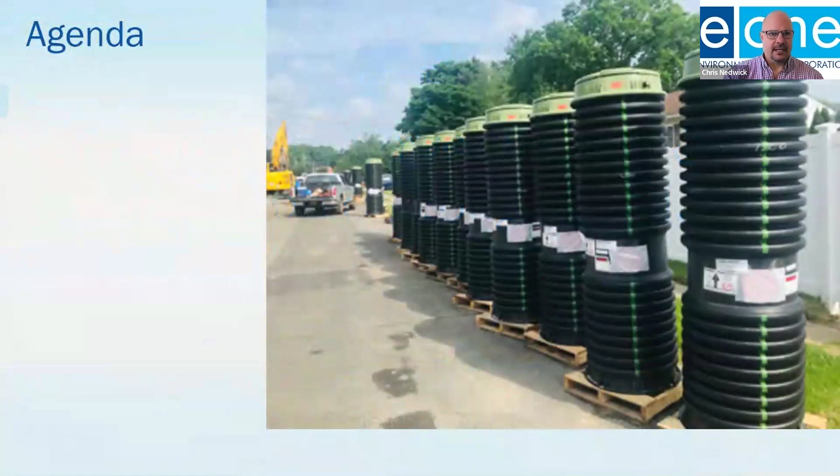We've got a lot of really good content that's specific to some examples in Long Island, New York, which is an exciting development for Environment One and for the community, and a lot of good content related to pressure sewer in general. Without further ado, I'd like to jump into the agenda.

We'll talk a little bit about the company background, sewer systems in general, pressure sewers, design factors related to pressure sewers, the E1 system, and commercial applications. And then finally, at the end, we'll have some time for questions and answers, as Rachel mentioned.

So a little bit about the history of the company. Environment One started as a General Electric research and development spinoff back in the late 1960s. The company was formed in 1969. We've been in the same location since then, developed the technology as a pioneer at that time and continue to do so.

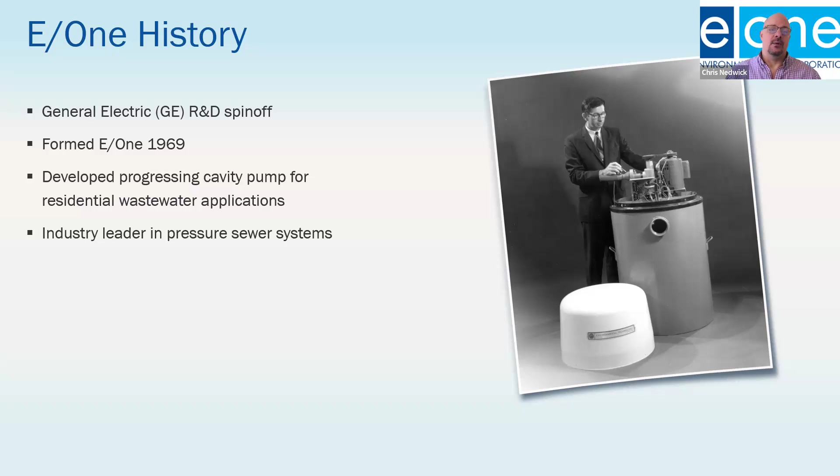We developed the progressing cavity pump specific to residential wastewater applications, really starting with the design challenges and working backwards to the design that's still consistent to this day. We are the industry leader in pressure sewer systems and very proud to say so.

We are in Niskayuna, New York, in Schenectady County in upstate New York. We have about 140,000 square feet, ever growing, available to us at our manufacturing facility, with 140 plus employees.

In conjunction with showcasing E1 as an industry leader in this market and beyond, we're also proud to be partners with Site-Specific Design. Site-Specific covers about 45,000 square miles, so they have a very sizable territory with 4 offices and 10 full-time service technicians to support these systems as we install them.

The design criteria that was specific and original to low pressure sewer was actually adopted by the American Society of Civil Engineers, and this really created the pressure sewer market as we know it today. Our design has been consistent with that criteria from day one. We continue to enhance, perfect, and improve that design on a continuous basis from a continuous improvement standpoint.

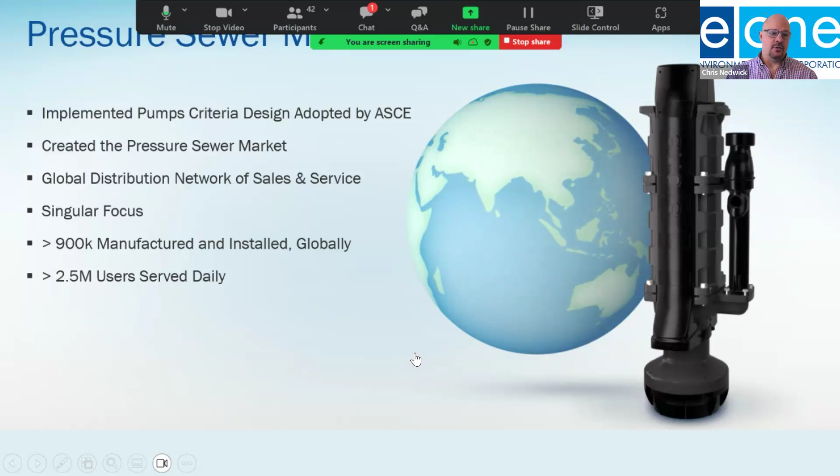We have a global distribution network of sales and service entities, a singular focus on this technology with 900,000 manufactured units installed globally, and about 2.5 million end users that utilize our products on a daily basis.

Our mission really is to provide complete and accurate design recommendations for pressure sewers to suppliers, engineers, and customers. Our focus is on the end user and the quality and optimization of the design. So we always want to keep that focus on making sure that the customer experience is positive.

As a trusted advisor, we support our customers from the planning and design phases of a system through construction and the life of the system. We'll talk a little bit more about that here today—things like contractor training, end user training, and service training. We really want to stay focused all the time on ensuring that things are done right and done properly.

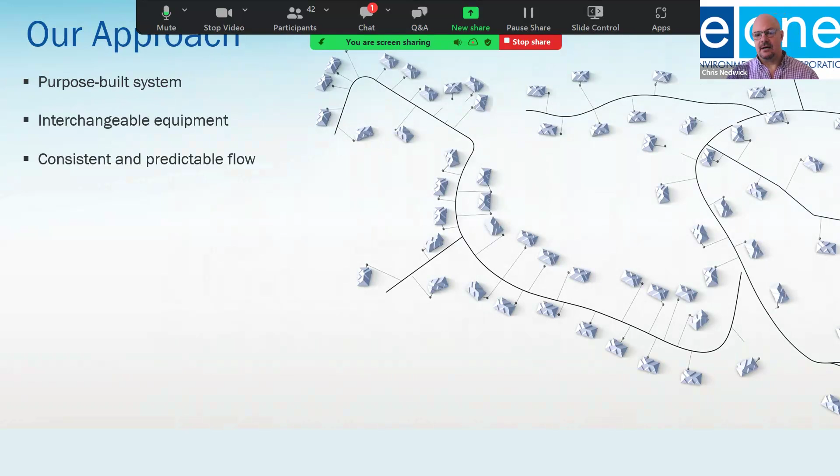So our approach is unique. We have a purpose-built system. Everything that we offer as part of this system is interchangeable and reverse compatible. A consistent and predictable flow is really at the heart of our pumping system and the designs that we create, in conjunction with engineers of record out there in the community as well. We want everything that has to do with these systems to be consistent and predictable.

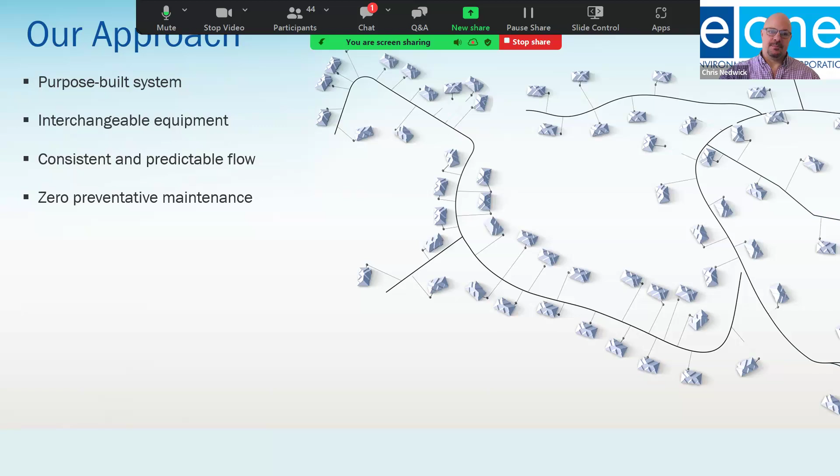There's zero preventative maintenance required with E1 systems as a UL approved appliance. Very important to our overall philosophy. Simplicity of repair and or replacement is also very important, and it helps keep cost of ownership as low as possible. Safety is number one with Environment One, not only as a company, but with the systems that we provide. We want to make sure that safe operation is top priority and that maintenance is always kept efficient and as simple and low cost as possible.

Continuous improvement is something that I mentioned earlier. We really have a strong focus on making this technology more reliable, more predictable, and keeping that cost of ownership to the end user as low as possible.

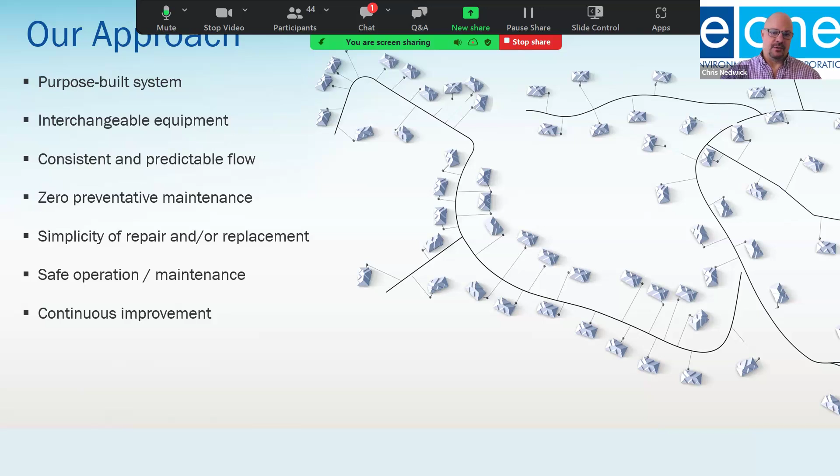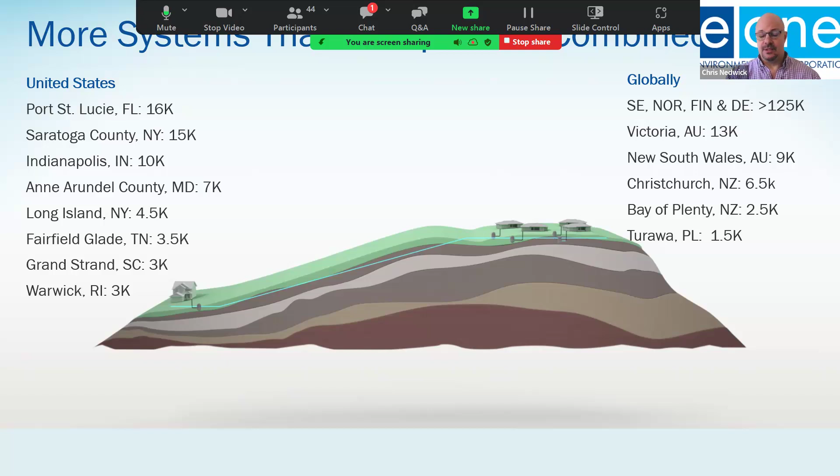So we have more systems than the rest of the industry combined, starting with Port St. Lucie down in Florida with 16,000 homes and businesses currently connected. Saratoga County, a similar number at 15,000. I won't read through every bullet here, but Indianapolis, Indiana with 10,000+ homes. In Long Island, we're already up to almost 5,000 homes at this moment. So the idea here is to show and demonstrate that this is not a new technology. It is a proven technology with entire communities that rely on E/One for their wastewater services.

Experience matters as well. In places like Albany County, with the original prototype system that we implemented 56 years ago, these systems are still running strong after all this time. So this is, again, a proven technology with a demonstrated track record.

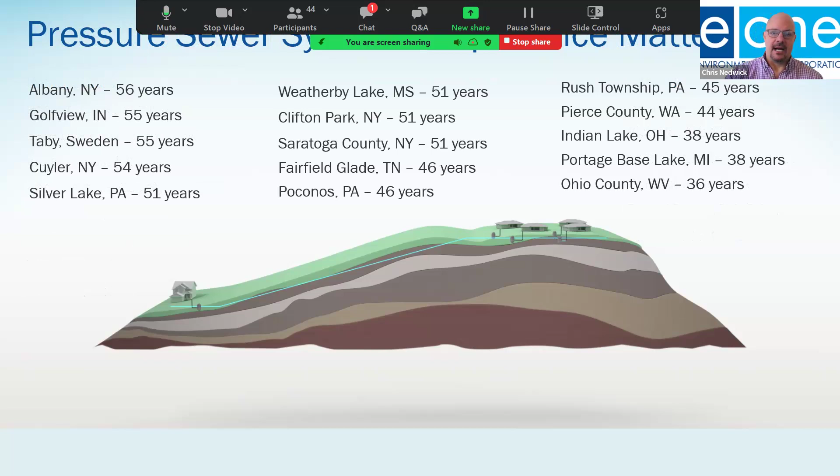And I'd like to hand it over to my colleague, Rachel Seiler, at this time for a poll question.

Yeah, so it looks pretty interesting and kind of what we would expect for the marketplace. I think most people on the call might know me. My name is Sean Cameron with Site Specific Design. We are the manufacturer's rep for Environment One in the territory, and I'm going to talk to you guys a little bit more about the experience and stuff we've done on the Long Island market up till now.

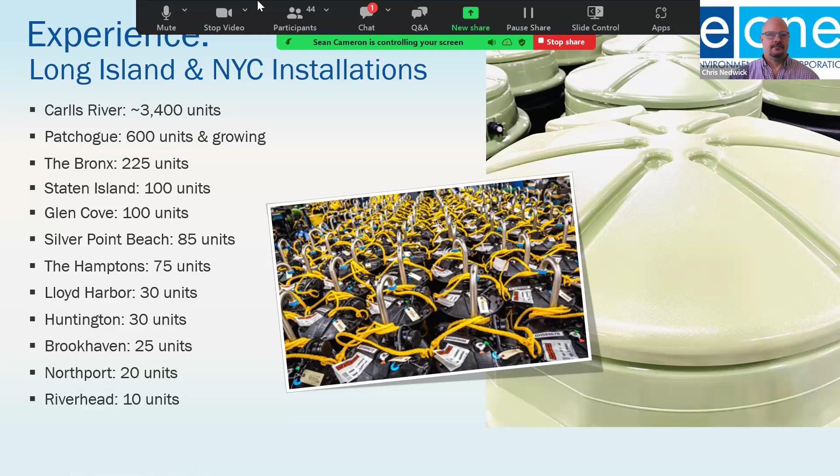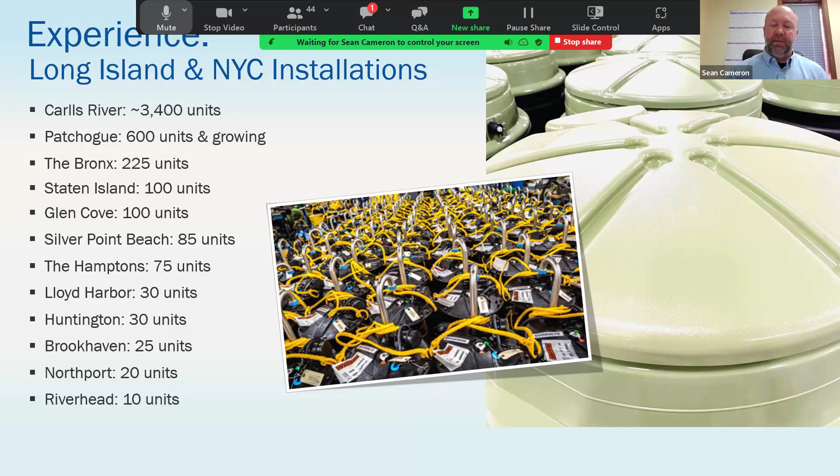Specific to the Long Island market, we have about 3,400 connections in the Carlls River area that took place over the last 2 to 3 years. A bunch have taken place in Patchogue. There's a huge project underway right now in Forge River that isn't on the list yet because they're not in operation. But as you can see, we've done a lot of different installations and applications on the island over the years.

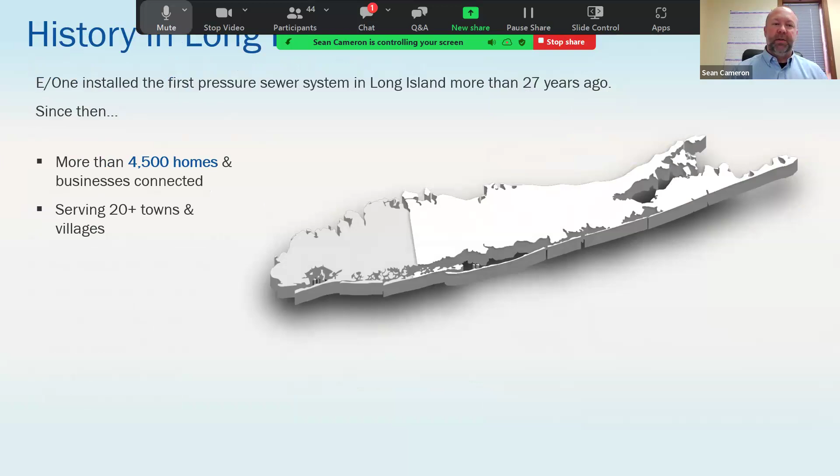We've connected to date more than 4,500 homes and businesses across the island. We've been doing this on Long Island for over 27 years. The first system went in a long time ago. We service over 20 different towns and villages throughout the island. We help bring several of these key projects to fruition with different technologies and tools that we have at our disposal. And in the future project pipeline over the next 5+ years, there's a lot going on there. New projects popping up every day. We remain fully committed to that cause.

Our goal is we want to work with the design engineers, the contractors, the municipalities, regulators, and everyone. There's a huge challenge when it comes to sewering areas, and we're involved in working with you guys on that.

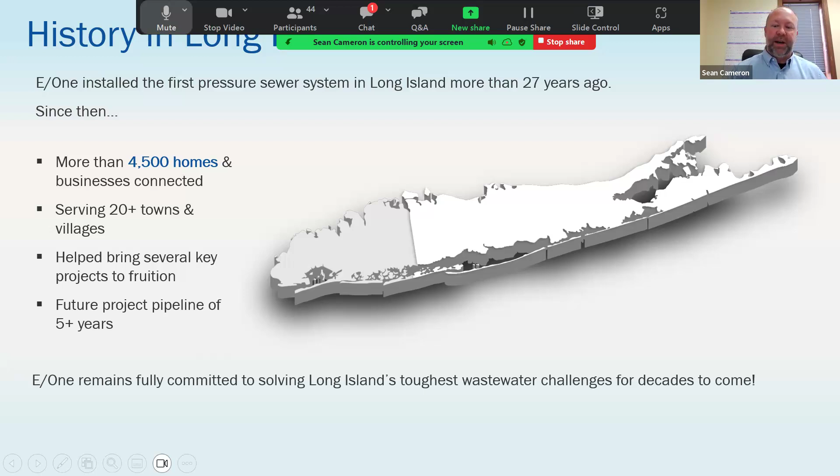Patchogue specifically, we like to touch on. They were the first place in Long Island to really adopt the pressure sewer technology. Currently to date, we have about 700 homes and businesses connected, and more going on this year. But their first system went in back in 1999, 2000, that era.

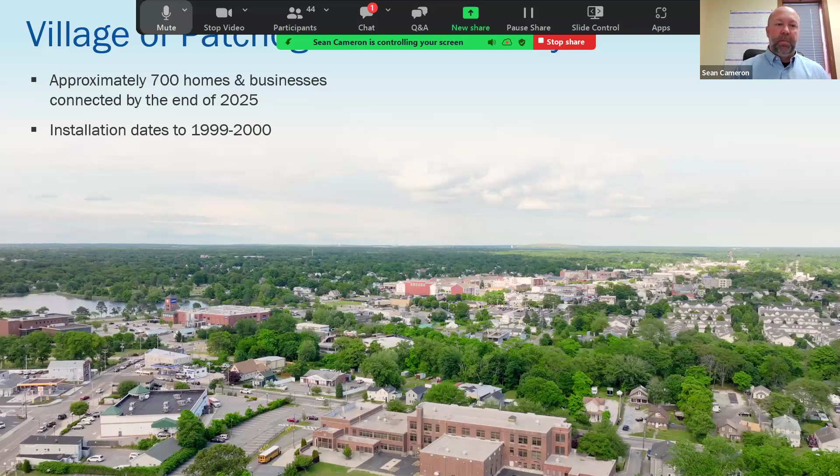Was a couple dozen connections down on West Ave and Main Street. We've been involved with them since the beginning. H2M architects and engineers were involved in that original design, and Chris Weiss has been a key player in that from that engineering group since the beginning.

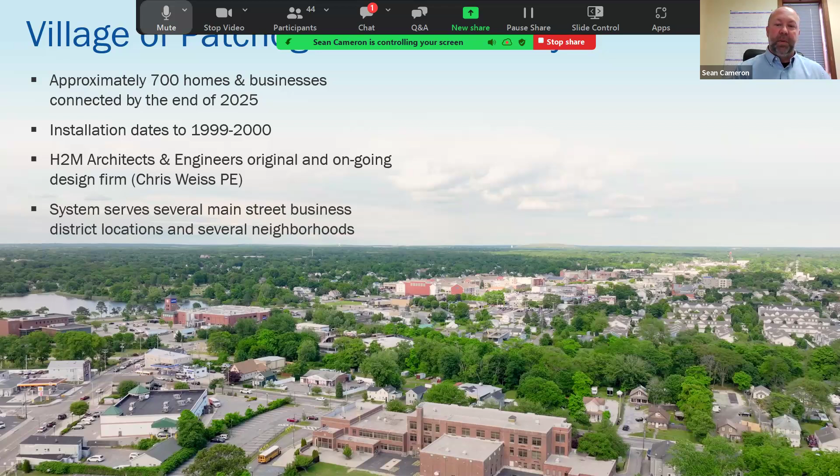These systems serve several Main Street businesses. Realistically, if you go to almost any restaurant in Patchogue, there's a chance that it's connected by pressure sewer to the gravity system, as well as a lot of the southern neighborhoods down near the South Shore.

One of the things that made this possible for Patchogue and all the other areas is, of course, a functional wastewater treatment plant.

Patchogue was kind of ahead of the curve on this. They built their own plant many years ago. It's currently up and rated for 800,000 gallons per day. But to date, they're only really operating in the 400,000 to 500,000 gallon per day range. So they have a pretty good amount of capacity already.

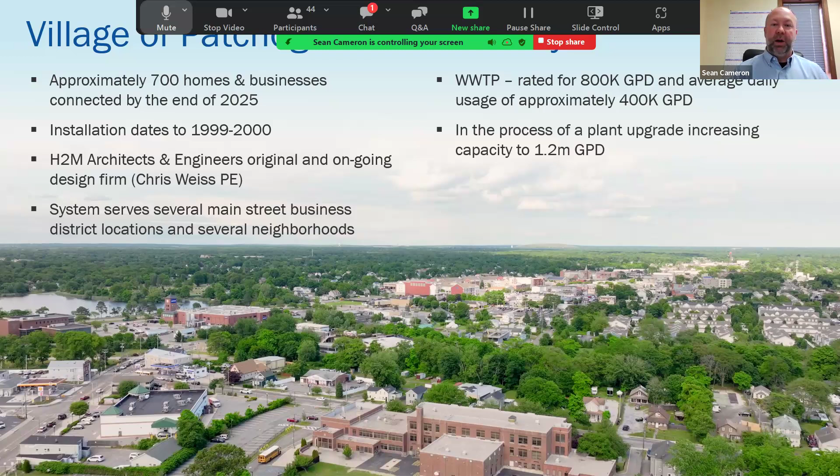But as we're looking at this, we intend to continue expanding on this. So in the meantime, in the background, they are also working on looking at some plant upgrades and increasing that capacity to about 1.2 million GPD.

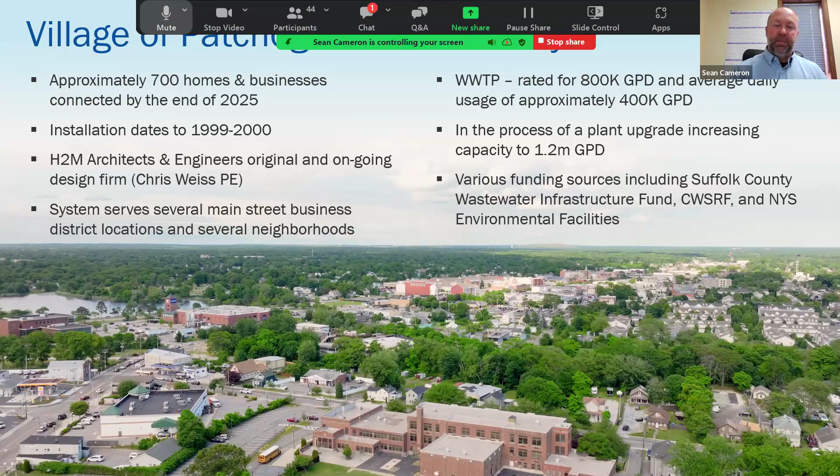So a lot going on there. Funding for this has come from many different areas. We had the Wastewater Infrastructure Fund for Suffolk County, CWSRF funds, and New York State environmental funds. Lots of different areas, but obviously a huge need in Patchogue as well as some of these other areas. So finding the funding has been key to getting that done.

So we're going to touch just on kind of sewer systems as a whole. I imagine for a lot of people this could be review, but we'll go through the basics. As we saw on the poll there, gravity sewer is something that a lot of people have worked with and designed. Pretty traditional design.

You have a pipe coming out of the house into a collection system located in the easement or roadway. That pipe connects into larger diameter pipes in the road, and eventually that will go to some sort of a manhole or pump station or directly to the treatment plant. This is a very widely known functional sewer technology.

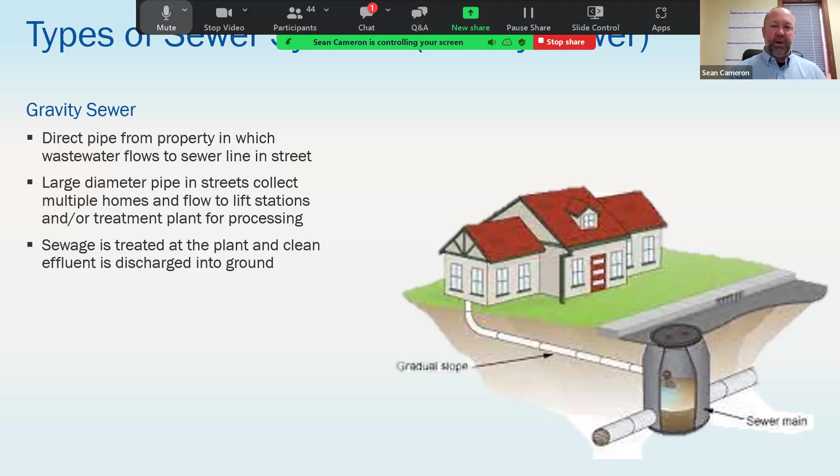Secondarily, probably the second most well-known technology would be septic tanks and cesspools. We have wastewater flow coming out of your structure, could be a house or business, into a holding tank. In Suffolk County, for example, as most of us know, prior to 1973, there wasn't even a requirement for a septic tank, so a lot of this flow was just going straight into cesspools.

In 1973, they came up with the regulation that you had to put a septic tank in front of that flow to collect the solids. And then the effluent that comes out still goes into the cesspools in a lot of areas.

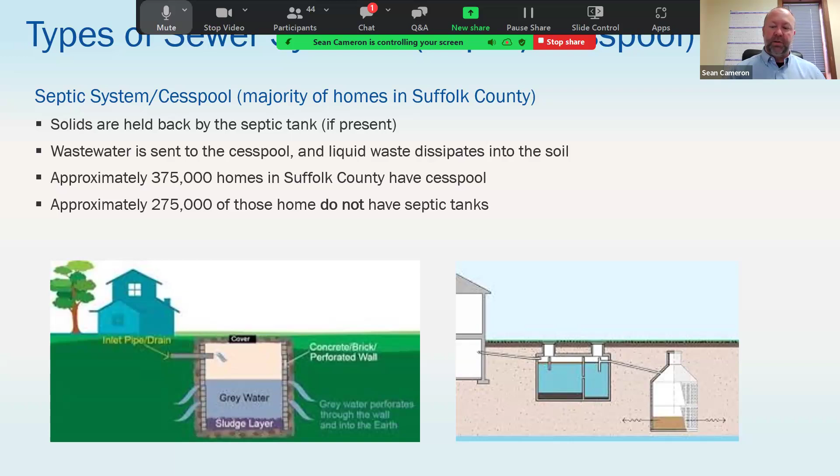Approximately 375,000 homes in Suffolk County are connected to a cesspool, and approximately 275,000 of those, built prior to '73, did not have septic tanks. That number may have gone down recently with the new regulations -- if you pull a permit, you either have to go to the septic tank or some of these other technologies we're going to talk about going forward.

So with septic tank and cesspool situations, you tend to have issues. With any technology, there's going to be pros and cons. With septic tanks and cesspools, as those units break down and fail, you can leach pathogens and noxious material into the ground. In Long Island, we're on a very high groundwater table and above one of the largest natural water aquifers in the world, so there's some more issues that could come to play there.

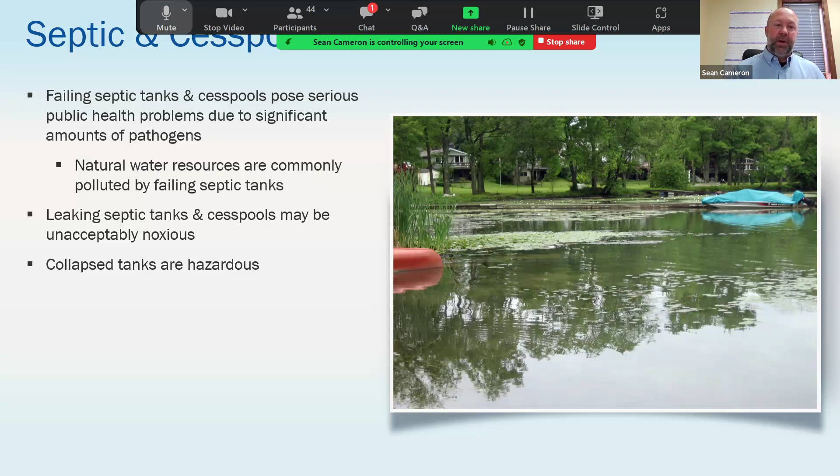So just some downsides of what you can see. As a result, Suffolk County did a case study back around 2012 where they looked at the state of the wastewater situation on Long Island. And what they found was that there were more than 400,000 septic tanks in place.

70% of those were installed before 1972, which required septic tanks, but I think it's cesspools. A lot of these were having issues and failing, and 69% of the nitrogen flowing into the Great South Bay was a direct result of these failing septic and cesspool systems.

Obviously that had negative effects on the ecosystem. Anyone who lives on the island or has been there knows the fishing and shellfish situation has changed drastically off the shore over the years, and a lot of that is a direct result of these high levels of nitrogen going straight into that ecology and ecosystem.

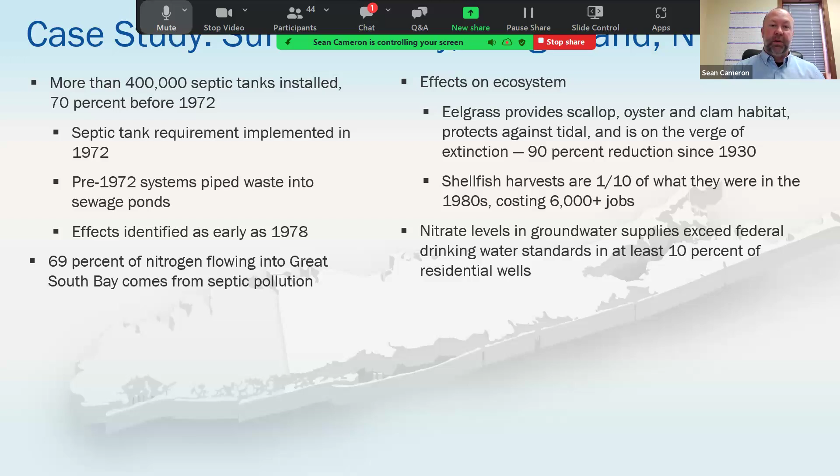So nitrate levels in the groundwater exceeded the federal drinking water standards in residential wells. They realized there was a problem and had to look into what options they had. It took time to do the research into different technologies and what good options were available.

They came up with two primary ways to address this. The first is IA systems, innovative alternative septic systems. These are essentially little packaged treatment plants installed in the ground in someone's backyard or side of the house. They can also be used for commercial applications.

The way these systems work is flow comes out of the house, goes through a septic tank to hold back the solids as well. Then the effluent goes into a treatment chamber or multiple treatment chambers, and that effluent is treated by introducing an oxygen source to let the bacteria live and thrive.

Your carbon source is your wastewater, so that's kind of a food aspect for the bacteria. And then you need a surface for that bacteria to grow on. Some technologies use just the walls of the tank, some have little balls or bags or plastic discs.

There are several different technologies approved in Long Island. Each does it a little differently, but at the end of the day it's the same process - we're growing bacteria. We nitrify and denitrify to get total nitrogen levels below 19 milligrams per liter, and then we're discharging a much cleaner effluent into the ground, into that same cesspool or a shallower depth type dispersal system.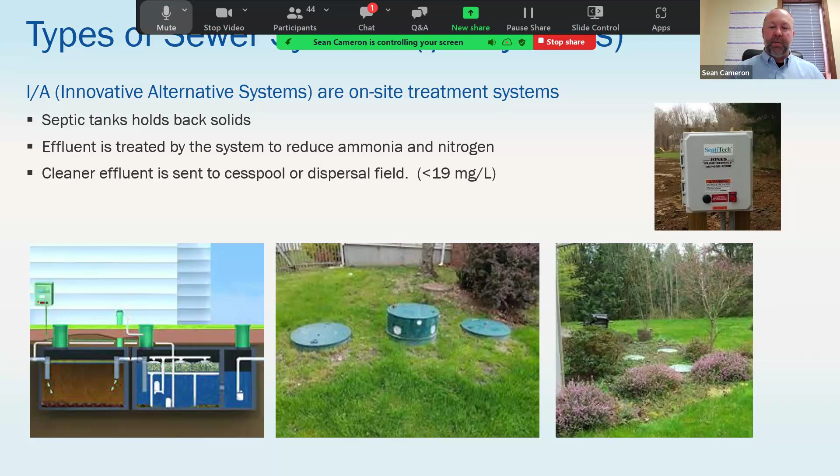The second type of technology that they looked at, and what brings us to our conversation today, would be pressure sewer systems.

So as Chris had touched on some of the history, we get more into what is a pressure sewer system. The basic view is that you have a tank, wastewater from the household flows through the pipes into this tank. As the water level in the tank rises, there's a level sensing device on the pump that activates it.

The pump will turn on, grind up all the wastewater into a fine slurry, and pump it out through a small diameter pipe to the road. Smaller diameter pipes in the road can get bigger as more connections are made, and then it eventually will pump to a treatment plant or something of that sort.

The grinder pumps can be installed outside in a yard or in the basement, just somewhere they can collect the flow from the residential or commercial connection. And obviously we want to keep the discharge lines below frost grade to keep them from freezing.

I always like to note that a grinder pump is different from an ejector pump, where an ejector pump is normally used in a lower level of a building for just one level of sewage to pump up to an already existing gravity output.

These pumps are typically designed for the entire flow of a building, and we are grinding everything up and pumping it into just about anywhere, but the ultimate design is a pressure sewer system.

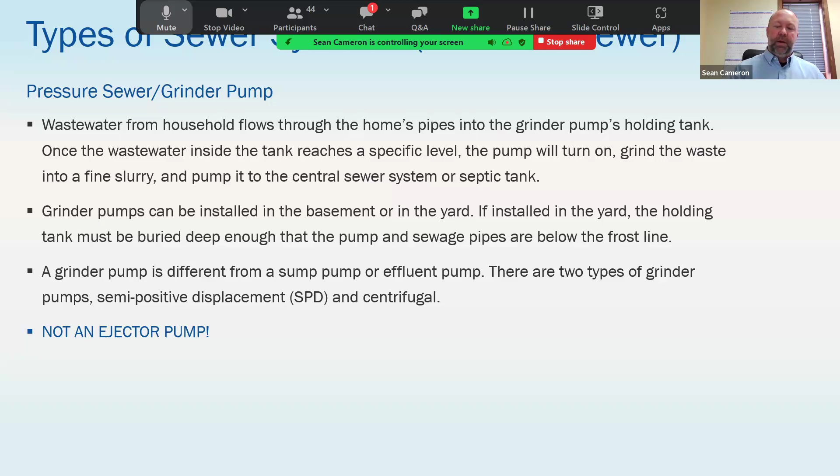As a result, the grinder pumps are here to stay. It would be safe to say that the IA technologies are doing very good in areas as well. The grinder pumps are used in areas where there is a centralized collection system and wastewater treatment plant - Bergen Point, also Patchogue and some other areas. The grinder pumps have been the go-to there, where you can centralize it and get even lower levels of total nitrogen that get into the ground afterwards.

To date, Suffolk County has installed over 3,500 grinder pumps in the last 2 to 3 years, and we are actively in the process of doing another 2,000. That should be done by the end of 2025.

The majority of these were in the Carlls River area, and Forge River is the project going on now, so that's the Shirley Mastic area. We've done several hundred, obviously, in the Patchogue area as discussed. We've also done projects in Northport and East Quogue that we continue to grow on, as well as tons of one-off applications throughout the entire island.

The force mains were installed in the streets, and then the grinder pumps were contracted separately to be installed on each individual property for all these connections. So at this point, I'm going to pass back to Chris to talk about some of the technology on a deeper level. Thank you, Sean.

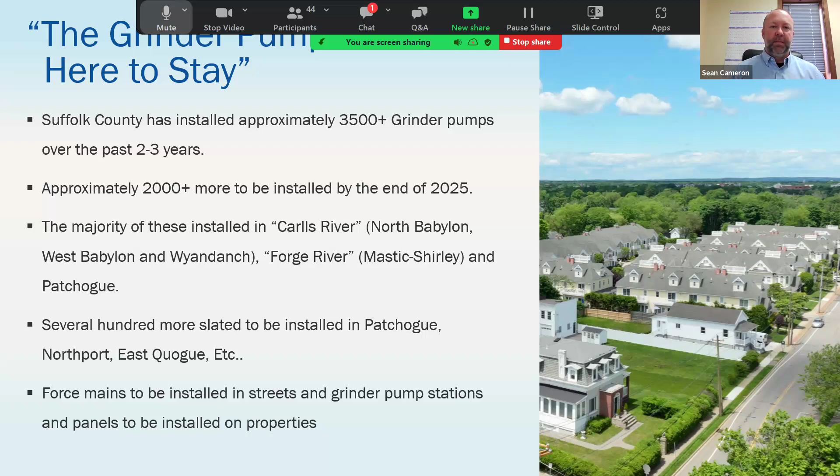So at this point in the presentation, we'll talk a little bit about some of the different types of technologies that have been mentioned already. We'll start with gravity sewers, and these are myths and misconceptions. One of the largest misconceptions we've all encountered over the years is that once gravity sewers are installed, they're free. This is not the case. Gravity sewers are actually very costly to maintain.

Anyone who's seen a Vactor truck or a closed circuit television system, or witnessed smoke testing taking place, knows it's a pretty involved process and tends to be very expensive. So that is a myth and misconception, that there's no regular maintenance required.

I&I is a very serious problem throughout the industry, and gravity systems are susceptible to it. We test gravity systems in this industry to locate I&I hotspots and eliminate them, so there aren't complications downstream at the wastewater treatment plant, and no cost associated with transporting and treating I&I. It's one of the most costly line items typically for any organization responsible for maintaining a gravity system. Chasing I&I is a big deal, and there are lots of firms throughout the country devoted specifically to this.

Also with cesspools, not having to pump them out regularly. Anyone who's been around the various communities in Long Island knows that emptying cesspools on an annual or even every couple of years basis can be very costly, and there are industries associated with this. It can cost anywhere between $600 and $1,000 to pump out a cesspool.

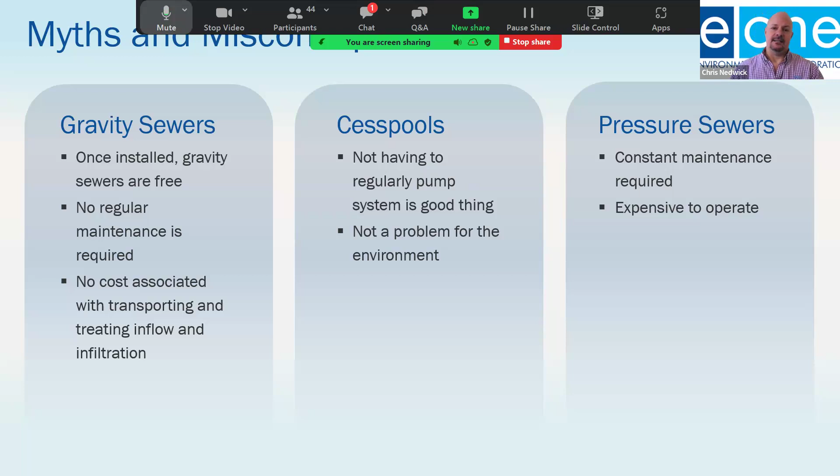We know through third-party data that one full-time service technician can service up to 1,400 homes in some cases. And even when you factor in energy costs, even with inflation in recent years, $30 to $35 a year is typical. So it's a very cost-effective way to introduce sanitary collection.

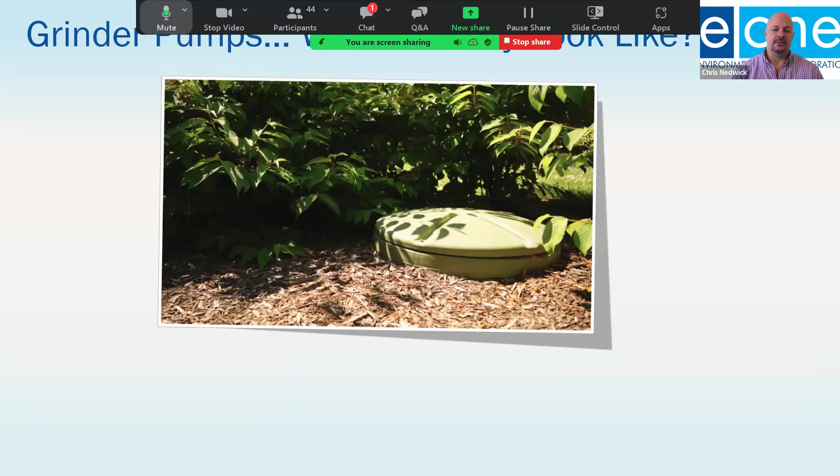What does it look like? This is an E/One station, and we take great pride in everything that goes into the design of this system. We try to make them as innocuous as possible, and we try to fashion the tank in such a way that it can blend into the neighborhood, the yard, the natural environment. It's an earth tone meant to kind of blend in. We want it to be somewhat hidden, if that's what the homeowner wants.

In some cases, these might be located closer to the point of demarcation between private and public lands. If the public entity is taking care of and maintaining the system, it might not be behind a bush like this, but as design engineers, it's important to know that flexibility is afforded to you.

Once it's installed, it does blend in, and there are a variety of different options available to keep with this theme. That's what we call a fake rock—it's a rock that covers the cover. Underneath that would be the cover you see on top, and that helps it blend into the environment a little bit more.

And then the system on the right is an IDU, or indoor unit. That's a 90-gallon tank, comes with a 5-year warranty, and can be located inside of the dwelling, the residence. It can be buried in the slab, so all you'd see is the very tip of the cover, or it can sit on the slab like you see there, and it's piped up basically to the main ventilation in the plumbing system in the house, and the main stack.

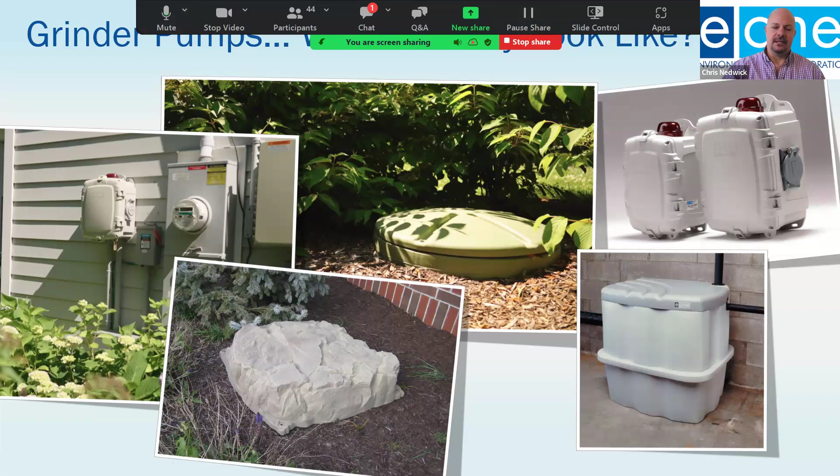Here's just another shot of the cover itself on the right. It's the enclosure, is what we call it—that's a technical term for it. And that is an alarm panel, it's not a control panel. So the controls in our system are installed in the pump itself, and the alarm features predominantly are what's located in the enclosure.

So a great question we hear is, where do we use pressure sewer systems? The answer is really anywhere where the flows are appropriate. But what we see mostly is where there's undulating terrain, not such a prevalent condition in Long Island—you get a lot more of that upstate. In other areas where the soil's rocky, that's going to be the case more so on the North Shore than the South Shore. Where you've got a high groundwater table, that could be the case anywhere in Long Island.

Because it's a small diameter technology that's far less invasive than gravity, you've got less excavation, so you have less issues managing groundwater, and really controlling those flows, documenting those flows, and having a place to put them. Flat terrain is a geological condition that's prevalent in the Long Island market.

One thing I want to pause on is that we drastically reduce the amount of lift stations required, or in many cases outright eliminate them. Flat terrain demands lift stations when used in conjunction with gravity, so eliminating lift stations can, in many cases, eliminate millions of dollars from the budget of your project. That's a very appealing thing engineers look at when considering pressure sewer systems.

A really important point is using pressure sewer in conjunction with existing sewage collection systems to expand the service area. We're seeing a lot more designs that have some gravity but also utilize a hybrid approach, where pressure sewer might be designed for the peripheral aspects or portions of that project—to have a different approach, make it more consistent with a budgetary demand, or deal with more demanding regions where some of these geologic conditions are prevalent.

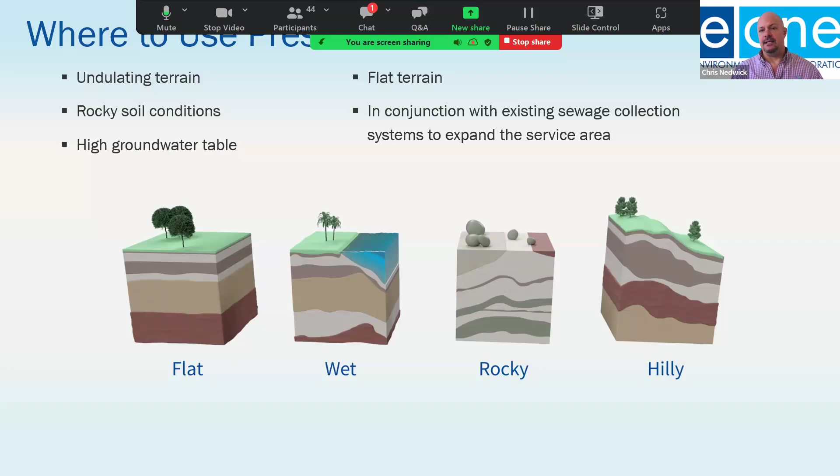So really the takeaway here is E1 pressure sewer, because it's progressing cavity, and we can follow up with a more in-depth treatment of the hydraulics associated with this. But we play well, so to speak, with gravity, with existing manholes, with headworks at wastewater treatment plants—really with almost any type of existing collection that might be there.

So how does this all work? Solids are macerated with an E1 pressure sewer system in the station itself, basically to a fine slurry. It's then discharged out of the station into a small diameter network of pipes. Again, we're different, we're unique—we consider the system itself to be that small diameter network of pipes, which we'll deal with more in some forthcoming slides. But we want to optimize that system and look at things like retention: how long is that wastewater going to be in those pipes for?

We want to get wastewater from the house to the station, out to the treatment plant as efficiently and quickly as possible, so you don't have odors or septic conditions. That pipe network is something we pay very close attention to: what are the diameters of the pipes in certain places, what's the material used, what's the installation method. These are all things we'll work with you on in your designs.

The wastewater is pumped, so there's no slope or pitch required like with a gravity system. As a design engineer, you can pump uphill, downhill, or go around things. Maybe there's a coveted or cherished tree that's important to the community that you don't want to disrupt. Because of the flexible nature of this technology, you can work around it and preserve the vernacular of the landscape, the main characteristics of the landscape.

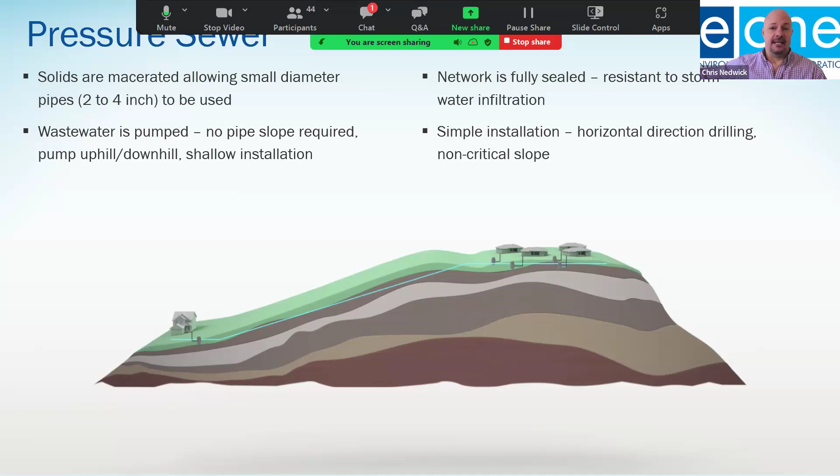A lot of times we're seeing horizontal directional drilling used. That's been very prevalent in some of the larger projects in Suffolk County. When the Carlls River project was installed, they didn't even have to shut down Sunrise Highway - there was limited disruption, so high traffic conditions and other societal impacts are all mitigated. When you're reducing the excavation required for a technology, you're reducing off-road diesel pollution, noise pollution, that beeping sound construction vehicles make when they back up. No one wants to hear that at 7 a.m. So if you're mitigating the amount of excavation required, you're also addressing all of those downsides. And again, no critical slope is required.

So here's what the system looks like. It's kind of a subterranean cutaway view of the station that also shows the home on the right, and the public lands, if you will, the street, where the curb box is called out on the left.

Pumped systems with positive pressure are common and more intuitive than other systems, so technicians are more successful diagnosing and correcting faults. What that means is if there's an issue at, say, 16 Main Street, the technician, through the training we provide, will quickly understand what's going on. If it's the middle of the night, they can simply remove a core and replace it with another one, then come back the next day when it's more cost effective and less impactful. The technicians can get on and off private property as quickly as possible, which mitigates and reduces risk - something everybody pays very close attention to.

Grinder pump stations provide a level of emergency storage in the event of a power outage or an equipment fault. So with our stations, if there's a hurricane that comes through and there's a prolonged power outage, you've got emergency storage inside that station that can be depended upon in that situation. You also have the generator receptacle, if it's a really extended situation, that can be utilized to evacuate or discharge the wastewater from that pump system itself.

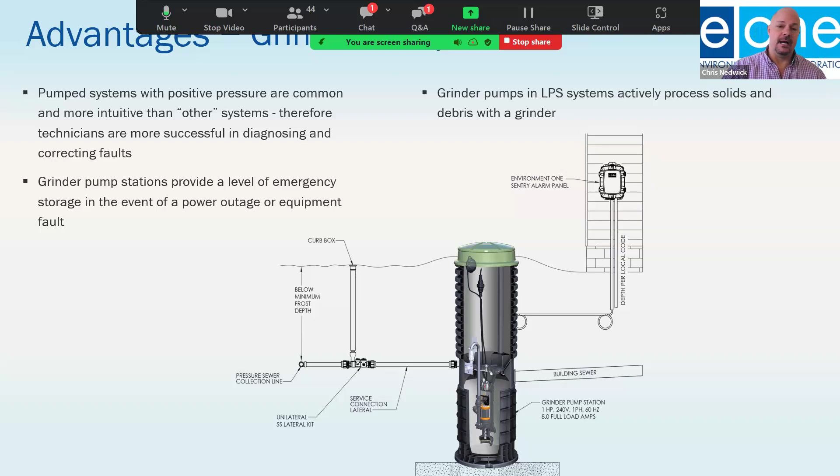Grinder pumps in low pressure sewer systems actively process solids and debris with a grinder, so everything that goes out into that system is a clean slurry. There's no disruptions, no blockages out there in the system itself. Something important to keep in mind when thinking about the operation of these systems.

No critical infrastructure is also something we'd like to point out. There are other technologies out there that rely on centralized infrastructure, things like big lift stations to work, maybe backup generators to work. If you have a vacuum system, if the integrity of the vacuum inside that pipe network is compromised in any way, you could have an entire section go out.

That's not the case with a pressure sewer system. So if Sean and I were neighbors and there was an issue with my system, it wouldn't impact his system. He would still have that critical service.

System abusers, this is something that's really become a high priority for operators and municipal managers. People abuse sewer systems, any type you can possibly imagine. We've all heard the stories of things that make their way out into the gravity system, causing problems - things that don't belong down the drain, with the Water Environment Federation terms, prohibited items.

With a pressure sewer system, all the technician would have to do is pop that cover, pull that core. That process would take less than 5 minutes, look inside that tank, and quickly be able to understand what the issue is, if in fact there were prohibited items making their way out of the house.

And pressure sewer systems have, again, virtually no stormwater infiltration. So we just wanted to reinforce that point here as well.

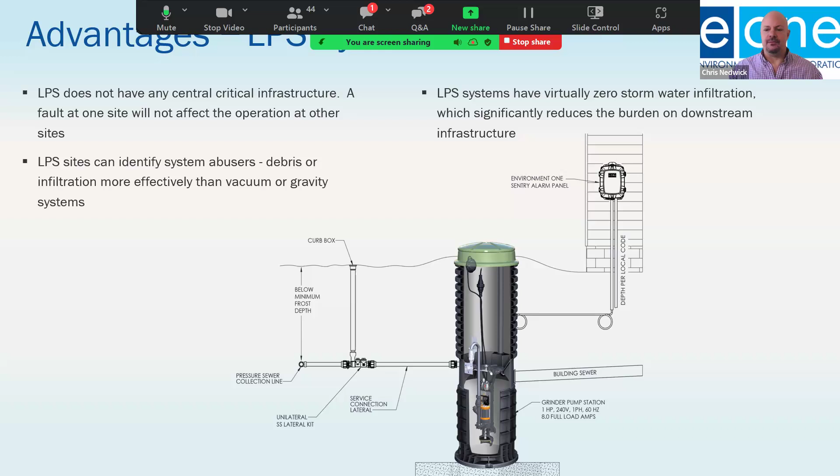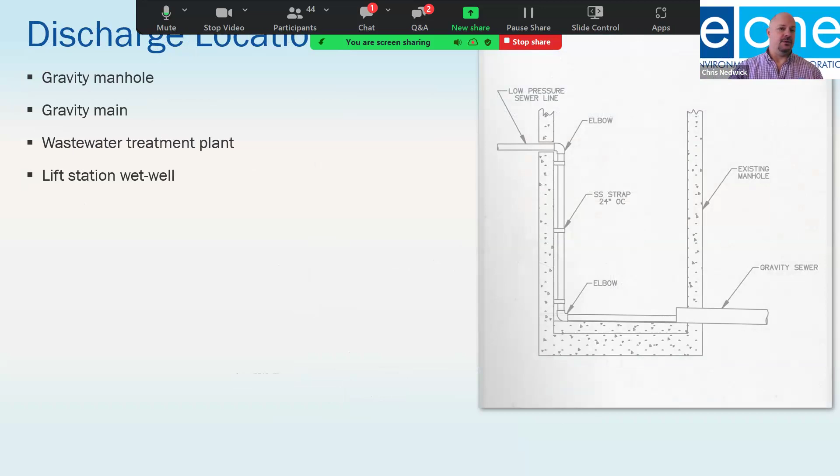A wastewater treatment plant, a lift station wet well - and in some of the forthcoming slides we'll talk about the hydraulic characteristics of the E1 pump. 185 feet of total dynamic head is a very capable pump, and it's going to be able to overcome system pressures in the vast majority of cases, and we find that to be the case. That's why many engineers utilize this technology where they have maybe an existing force main that might be close by.

We had this interview with Mayor Pontieri from the village of Patchogue, a great man who talked about the history of their system. He made a very interesting comment: it's those long distances where the costs are really incurred with any type of infrastructure, but certainly with wastewater. If that force main is a mile away and you're connecting to it with a 4-inch or less E1 force pressurized pipe, well, the cost associated with making that connection is reduced significantly. So the lower cost of ownership, the lower cost of installation extends beyond just the system proper - it's getting to that other type of collection infrastructure that might be present as well, again with minimal disruption.

We can go to septic tanks. We don't see too much of that - Suffolk County and a lot of the regulatory agencies down there are really moving away from what we would consider a traditional septic tank, but we do have examples where communal type septic systems have been used and utilized with great success over long periods of time. Treatment lagoons is one of the things I'm thinking about in particular here. So those options do exist as well, and some of those have been proposed out east over the years.

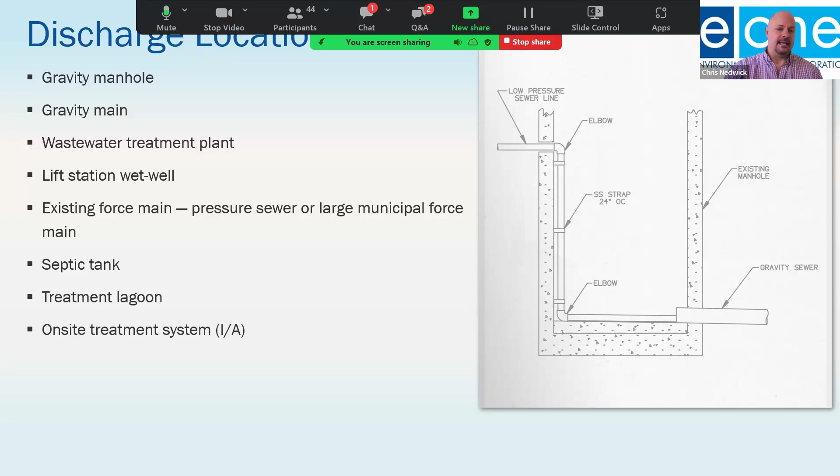We can follow up with more information on that if that's interesting to you. And on-site systems, these IA systems that are being utilized, Sean could tell you more about where E/One systems have been used in conjunction with those as well.

And larger intermediate grinder pump stations, a lot of times these are E/One systems, and we're seeing a lot of these being installed down there right now, but it could be a larger Flygt station, a HOMA station, or some other type of large, what we call big iron lift station manufacturer. More times than not, we can integrate seamlessly with those as well.

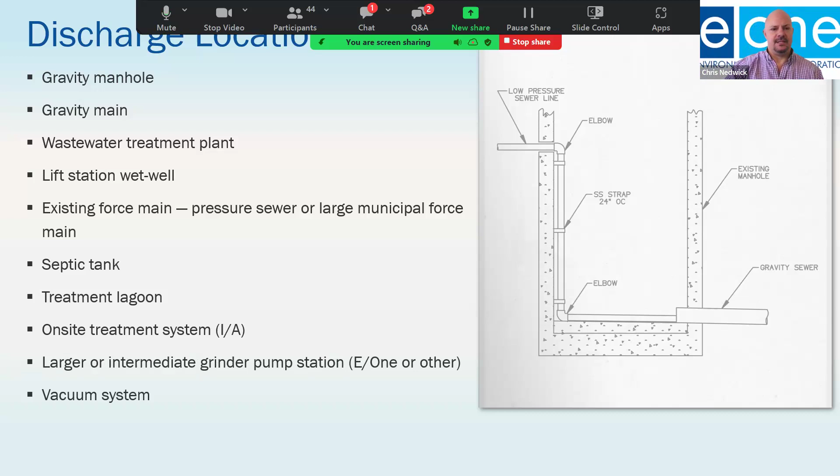Vacuum systems, we don't see any of those down there, but there are certainly other cases where we have interfaced with that type of technology as well.

Very important point to emphasize is really our design approach. I mentioned previously that interchangeable equipment factors heavily into keeping cost of ownership down. We want the end user to be able to keep one set of parts on the shelf and have one type of training and one type of knowledge. We make one pump for this application.

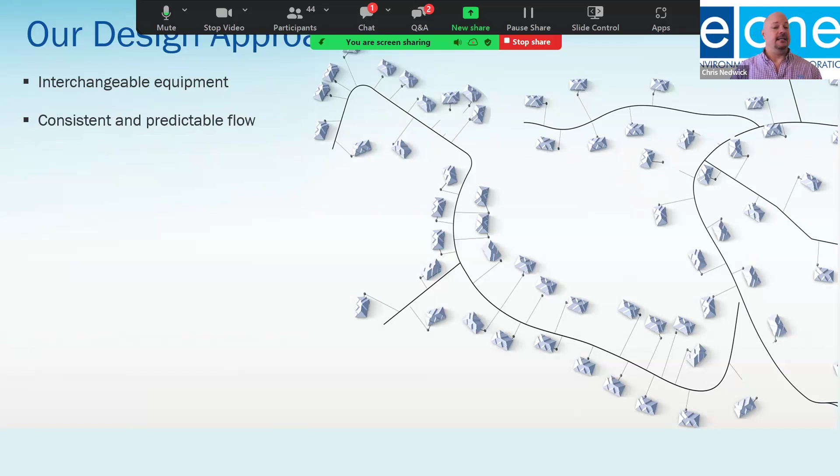The variation with an E/One system comes in the tank itself and in the panels, and maybe in some cases, certainly we see it a lot in Long Island, with the communication equipment that it comes with as well.

Engineers, one thing I've learned over the years, love predictability, right? You don't want to install something that's not going to behave the way that you intend it to. E/One systems are highly, highly predictable technology, and we can demonstrate that through our application design process, and pretty much tell you how each zone and each section of that system is going to behave.

Everything from retention time, total retention time, to velocities per second, to what size that pipe is going to be, to where each station is going to be located, where that force main should be located, things like air release valves, service connections. We're going to make all those recommendations to the engineer of record, and we discuss those aspects with them before they stamp it and actually put it into use.

Simplicity of repair and replacement. Again, as a UL certified appliance, we like this technology to be invisible to the homeowner. I've received phone calls over the years from folks who said, 'Hey, I built this house in 1990. I had no idea that I had this thing.' On the one hand, it's unfortunate when there's a service issue, but 30 plus years of invisibility, we can hang our hat on it and say job well done.

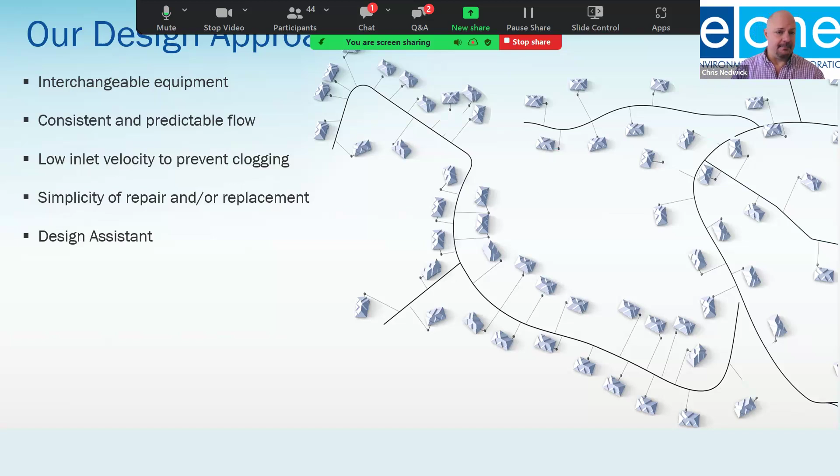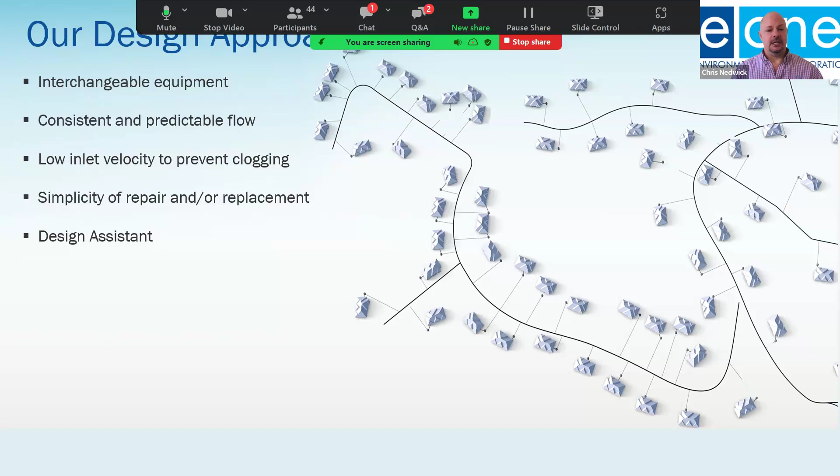That's what we want. We have a proprietary software system called Design Assistant. We have the most capable team of design engineers at the plant who can walk the engineer of record through this process, designing these systems through this software, which you can download from our website, www.eone.com. Really, it's a program that designs these pressure sewer systems and ensures that they are optimized and designed in a way that we approve of, and that's going to produce years of reliability.

This image on the right is our performance curve. You'll see how there's a negative condition below zero, and it goes up to 80 PSI above that. You'll note that this is not consistent, or it doesn't resemble what would be a typical centrifugal pump curve, for example. This is almost vertical.

So what this means is, and again going back to some of those earlier slides in the presentation, the folks that designed this technology from day one understood something that's very critical to understand about pressure sewer systems: you're going to have varying system pressures. So being the case, you need to have a pump that's going to work no matter where you put it, as long as that system behaves within the total design criteria on the system curve.

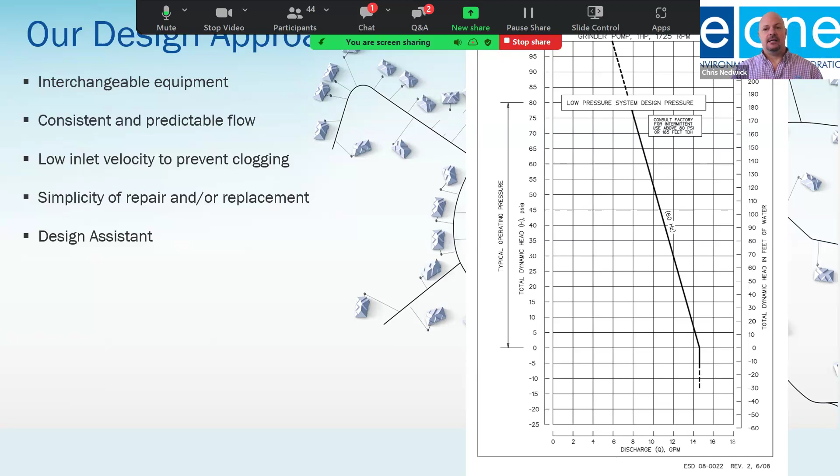So this pump is going to be predictable. It's going to deliver anywhere between, call it 8 and 14 gallons per minute, no matter where you put it. Could be up at 80 PSI, could be down below zero. It's going to behave in a way that's predictable.

On the topic of application engineering designs, there are a couple keys to our design. We can really get you started with something as simple as a Google Earth image and maybe just 4 to 6 other bits of information that are critical to understand to get at least a back-of-the-napkin understanding of whether the system will work, what the potential budgetary costs would be, and what it would look like. One of those keys is a layout of the lots to be served.

If you're working with an existing municipality on a cesspool or septic to sewer initiative, you're going to have a plat or drawing, an as-built, that shows where the property lines are and where the homes are. We'd like to have that so we know where the connections are going to be originating from, and what the potential flows per connection per lot would be.

With a residential application, we use, depending on the local regulation, about 250 gallons per day. If it's commercial, it can exceed that. On those commercial connections, which Sean will talk more about, we really go through great pains to have a comprehensive understanding of what's going on there, what the expected daily usage is, and what the solution recommendation is for that location, including pipe type.

Typically we use Schedule 40 PVC, SDR26, SDR11, and we see a lot of SDR9, SDR21 as well. That's rated up to 160 PSI. The burst pressure on those, depending on the material used, can be greater than 300 PSI. So it's a very resilient, robust pipe network. These pressure sewer systems are tough once they're installed.

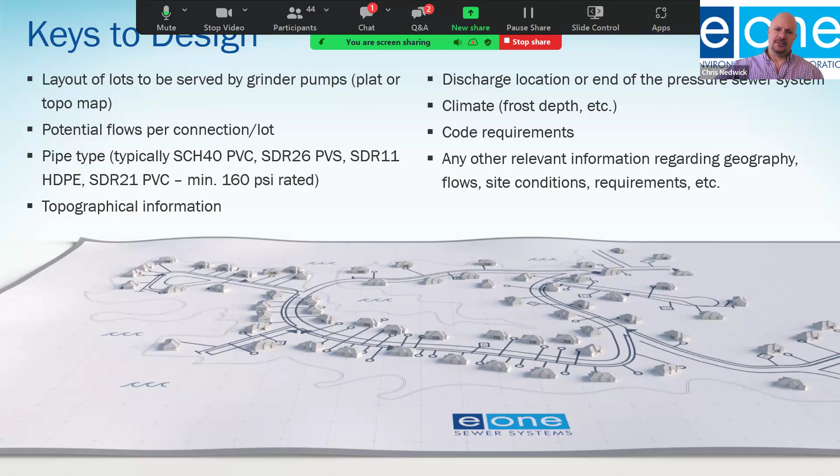Really any other relevant information regarding geography, flows, site conditions, requirements - a lot of those things tend to get flushed out, no pun intended, during the discussions that take place as a result of these AE studies, as we call them. And pipe sizing is really critical to this area of discussion.

So just to give a quick overview - between site-specific and design, working hand in hand over the years, we've really interfaced with a lot of engineers in the Suffolk and Nassau County markets to help educate them on how we design systems, so that you have confidence in the design that you're producing on behalf of your client.

But basically what we utilize is called the probability method. And what the probability method spells out is the total number of pumps that will be operating simultaneously at any given time in a system. We do that through zones, and we compartmentalize the system into zones.

And as the system, it's basically like a water system in reverse - as the system grows downflow in that direction, we add zones, and we add those zones each time SIMOPs increases by a rate of 1. And retention times, as you mentioned before, and what the total dynamic head will be in that system at any given point in time.

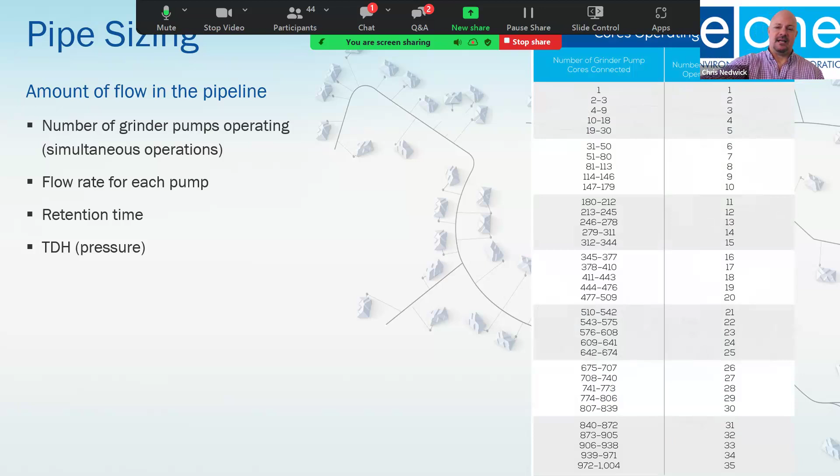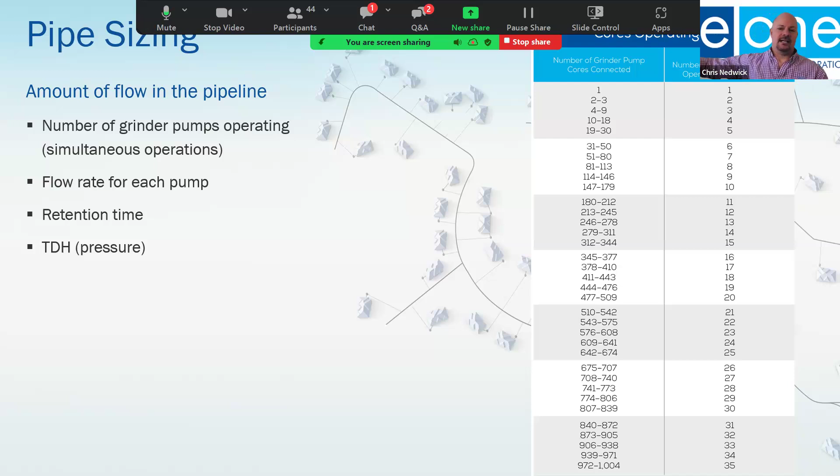This chart on the right is a hypothetical, and it starts at the top with 1 pump and eventually evolves down into more than 1,000, 1,004. This really encapsulates the beauty of a low pressure sewer system design. It's why we can maintain that small diameter pipe, because we're not designing for the flow rate that would come in one chug, if you will, from 1,004 homes. We're designing for the SIMOPs that we know will take place in that system, which is on the right. So we're actually designing that pipe for 35 homes flowing at one time as opposed to all 1,004. That's really where the magic lives.

We'll work with you also on placing air release valves. We call for those as well. And also with the piping size and the piping type, we'll walk with you through that area as well.

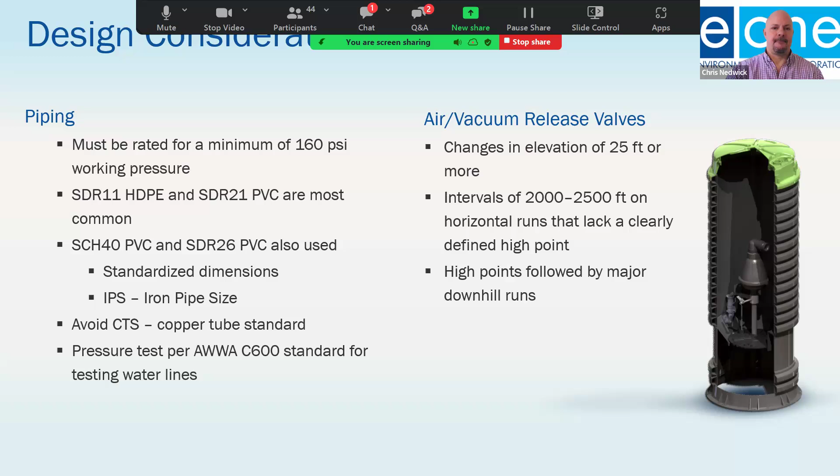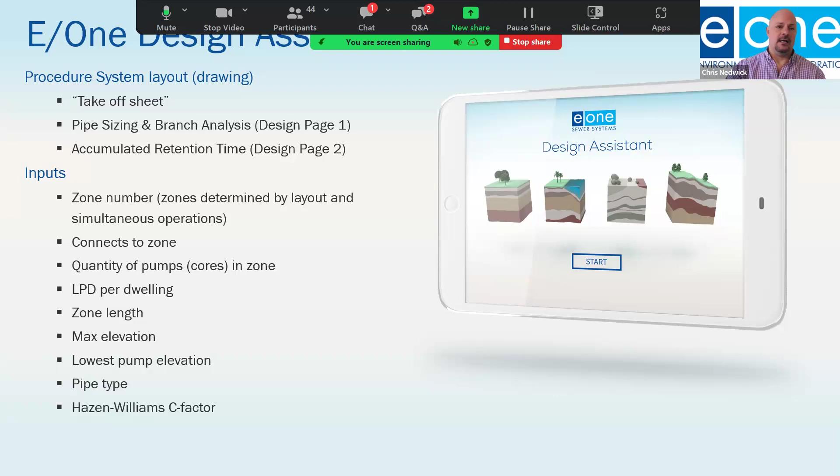Design Assistant, if you're interested in this, is the program I mentioned previously. It's a proprietary program based on the probability method, and with some very basic inputs, a system can be designed. Sean and I would love to follow up with anyone on this call interested in downloading Design Assistant to walk you through how this works. If you're looking at a potential system, Design Assistant is a great place to start that conversation. We provide training on this, and we provide this service free of charge to the engineer as well.

The Unilateral is a critical piece of equipment that we recommend. We actually require it as part of our spec. It's a 316 series stainless steel system, a 3-in-1 design with a flapper style check valve, a clean out, and an isolation valve. It's very corrosive resistant, being that 316 stainless material, and it's fully tested from the factory, so when you receive these, you know they're going to work in the field. They're rated up to 235 PSI. This would take the place of off-the-shelf plastic components that have to be glued together by a technician in the field, and it's a great way to reduce risk and know that system is going to produce years of reliable performance.

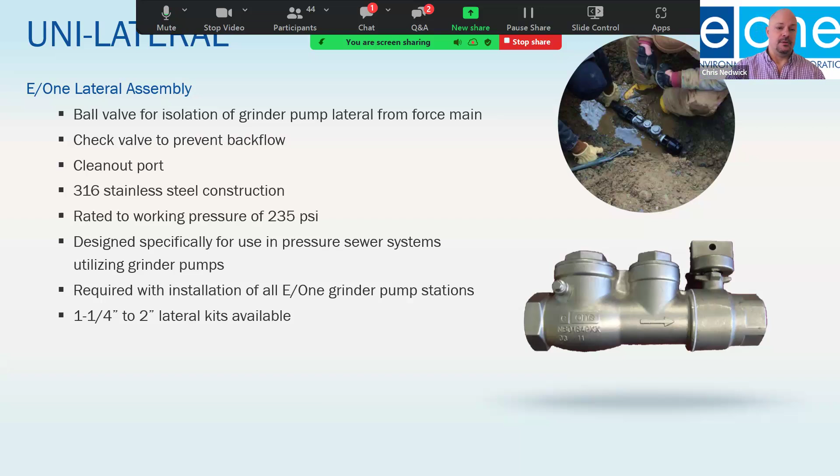We go from 1.25 inch up to 2 inch on those. The 2 inch you see mainly with commercial applications.

The technician would show up, isolate power from that system, isolate flow by lifting the flag valve that encapsulates the top of that candy cane, effectively isolating system pressure, extracting the core from the tank, and then providing service or conducting a service call. This process can take place in less than 15 minutes, so it really does help keep cost of ownership down.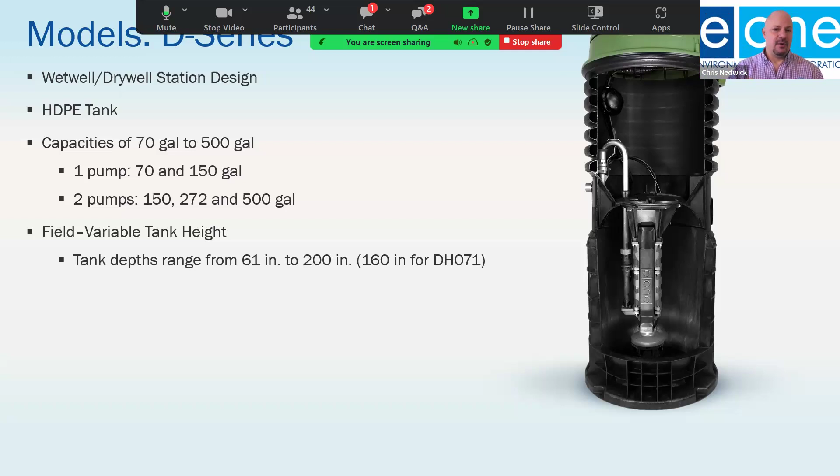Everything with these tanks is dictated by the invert depth, so we can go up to 160 inches. In your market there, you probably wouldn't see anything less than a 93 or a 74-inch station.

Field adjustability really is something that's critical to field installation. A lot of times the invert doesn't line up the way that we thought it would, or you thought it would, in the field. So a simple phone call to Sean or Zechariah or somebody from Site Specific Design, and they can show up with an extender, if you will, that can help adjust that basin height.

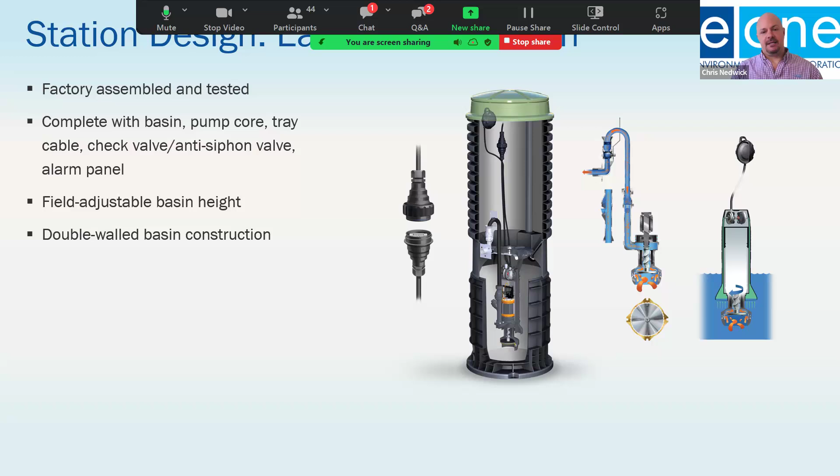The core itself is a unique area for us. It's a modular design, so everything the pump needs is located inside of the tank itself. The electrical quick disconnect, or EQD, is what you see on the left. That takes the place of a junction box, and it's a 6P rated design specifically for the application. Makes serviceability a lot easier, safer, and quicker.

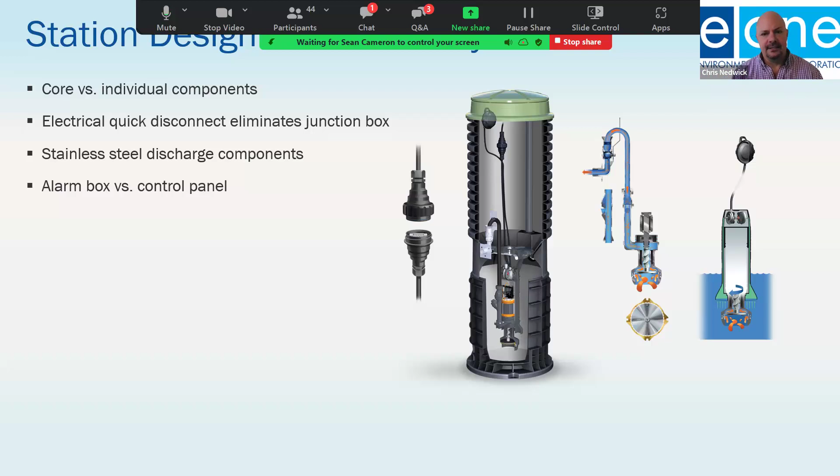And as I mentioned before, our alarm panel is truly an alarm panel, not a control panel. The controls with an E1 pump are located inside of the pump itself. They're specific to the pump itself. And with that, I'd like to turn it over to my colleague, Sean Cameron.

Sorry, Chris, I skipped a slide there.

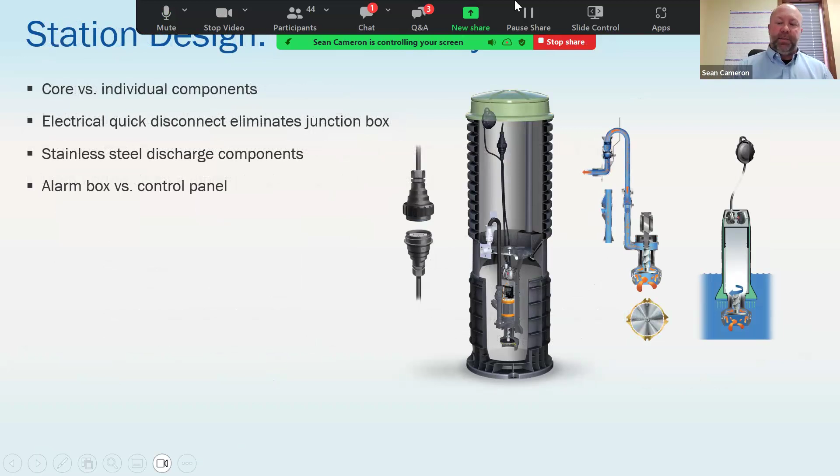So I want to touch on some of the commercial applications for the E1 products. Similar to everything Chris has talked about, all of the same physics and everything come into play with commercial applications. Obviously, the biggest difference is flow, so we have a variety of different systems we can look at for different flow applications.

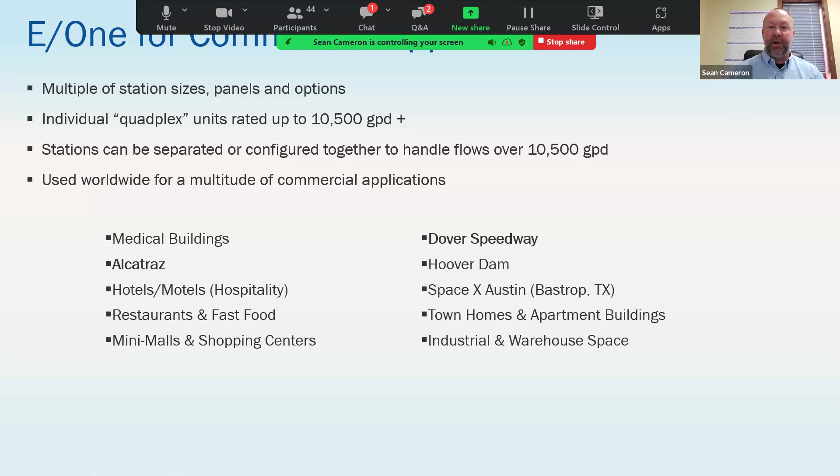We've done a lot of different commercial applications in the past, everything from Alcatraz, Dover Speedway, SpaceX, and a bunch of residential applications with townhomes and things like that. We can handle flows of 10,500 gallons per day in a single quadplex. Even our duplex systems with the D series, like Chris was talking about, we can do up to 6,000 gallons per day with one of those. And we've done different applications where we have multiple quadplexes if needed to handle even higher flows.

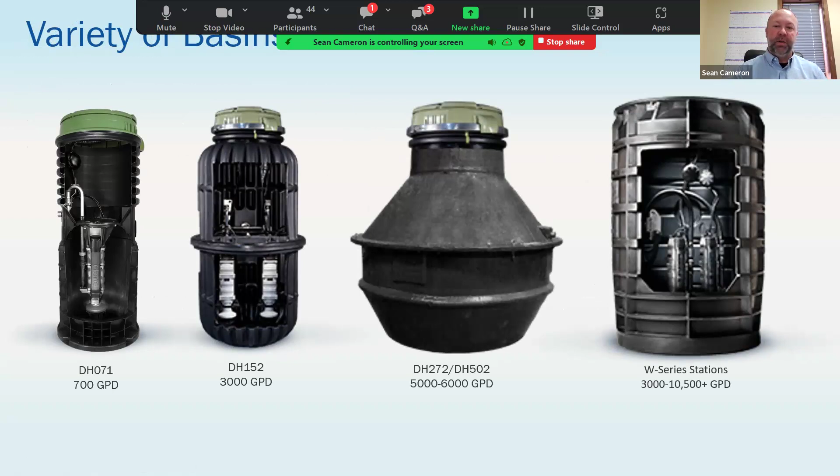So as discussed, that gives us a different variety of basins. The unit on the left, as Chris discussed, that's more for residential. Then we get into some larger duplex configurations, all the way up to some open wet well designs you see on the right with the W series.

Control panel offerings, as Chris discussed, alarm panels, control panels, we have a whole gamut of these depending on your application. So the best thing to do if you have any application, residential or commercial, is reach out to us. We can work with you on the design of what is the right tank, what is the right panel to achieve your goals and your flows for your end user.

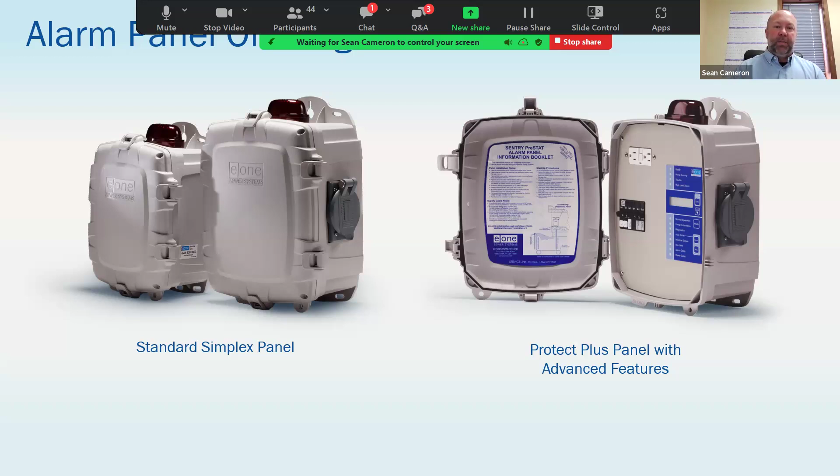Sentry Advisor is another key tool. Residentially, we're using this for all of the county projects so that they can get alerted when any of the residential units go into alarm, since the county actually has to take care of the O&M on those units.

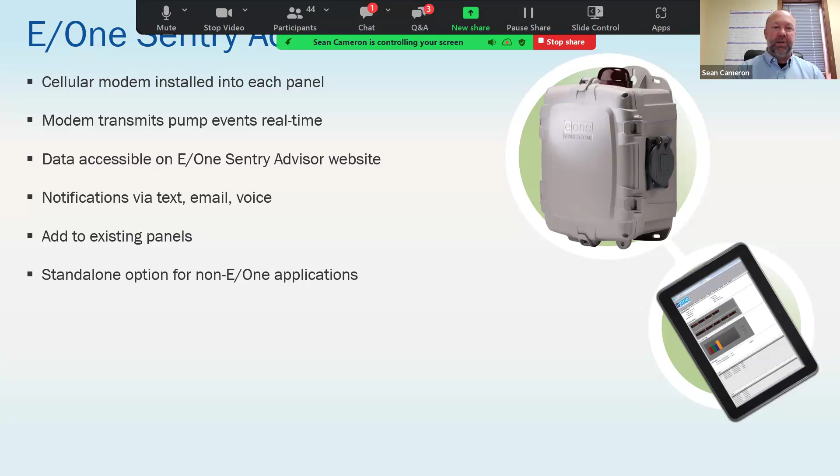Commercially, for me, I feel it's even more important. If I owned a business and that business is my livelihood, and I have a pump station that may have an issue, this is going to be a way that I'm able to get notified and have historical data on how my pump system is working. And from our side for serviceability, it gives us even more information we can utilize to make sure that when we arrive on site, we have an idea of what's going on with the system and how to better approach the service of that system.

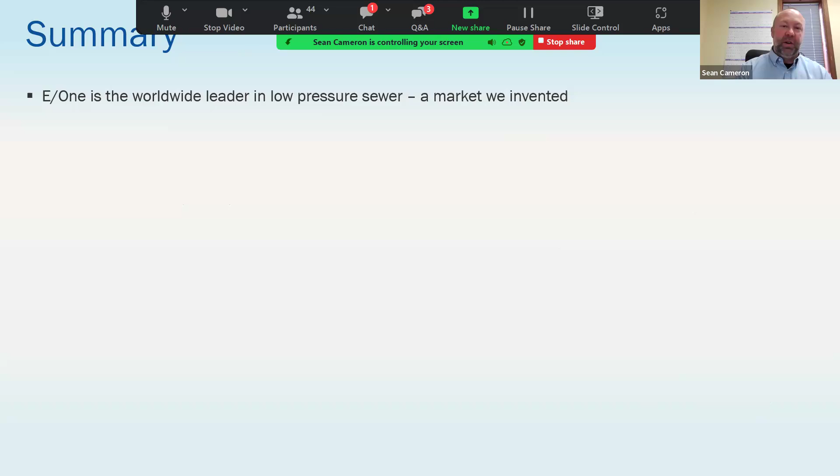So, quick summary on what we've gone through here. Low pressure sewer is a definite market that is in play in Long Island. E/One is the birthplace of that technology. We've been doing it a long time, so reach out to us if you have any projects that you think might be applicable for this technology, or any technology we can work with you on. The systems are easy to design, easy to install and operate. They're an appropriate technology for high performance value applications, with low upfront cost in comparison to some other technologies.

There's a worldwide team of guys like us that are here to create relationships with the customer, and we're trying to create that relationship for life, where we work with you from design all the way through serviceability. We want to be that trusted advisor for you. As I said, call me. There's plenty of times I have engineers and contractors call me and I'm like, we can't help you with that, but I know someone who can. We're not scared to say it's not our place.